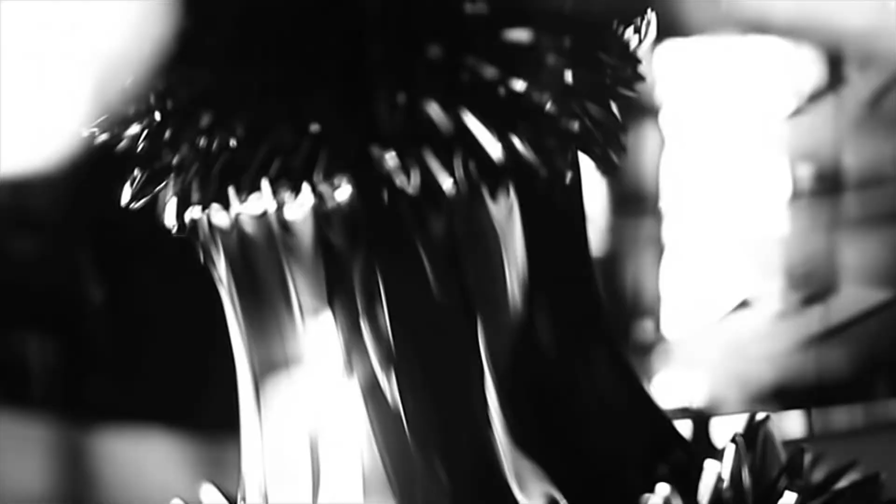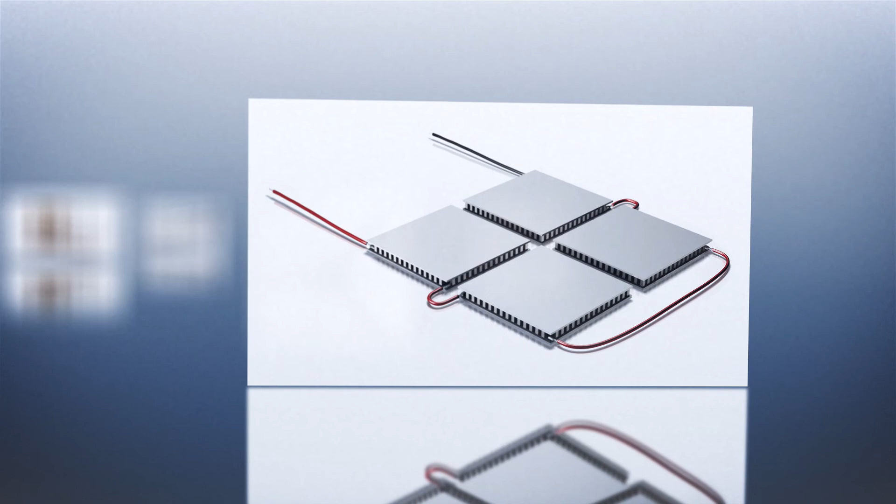Since its foundation in 1980, Ferrotec has polished its unique, distinctive technologies and launched a wide range of products, primarily focusing on the semiconductor market, and greatly expanded its presence on the world stage. In the fiscal year ending March 2022, we had 133.8 billion yen in net sales and 26 billion yen in ordinary profit, both record highs.

Let's look at our growth strategy for the semiconductor equipment-related business segment. The semiconductor memory market is being boosted by the expansion of communications and network demand, the use of AI in applications such as automated driving, and investment in data centers. Over the medium and long term, rising use of applications such as the metaverse is expected to drive an explosive increase in demand for semiconductors, such as the chips used in 3D image processing.

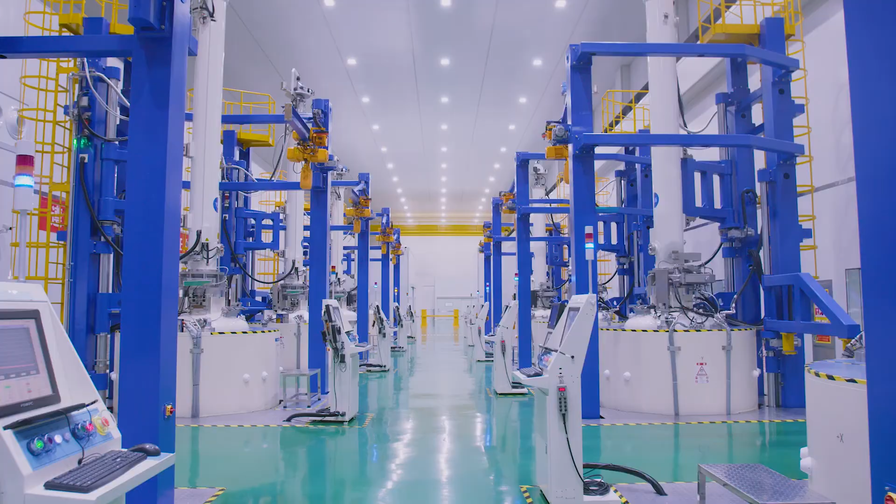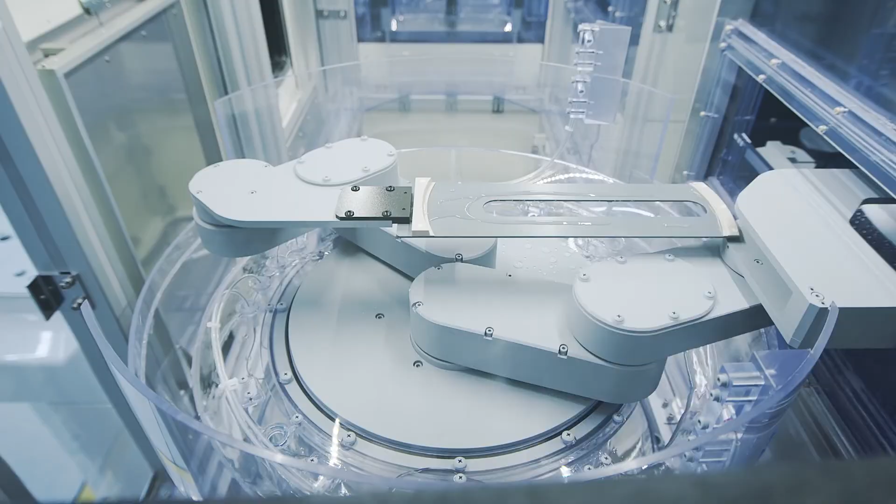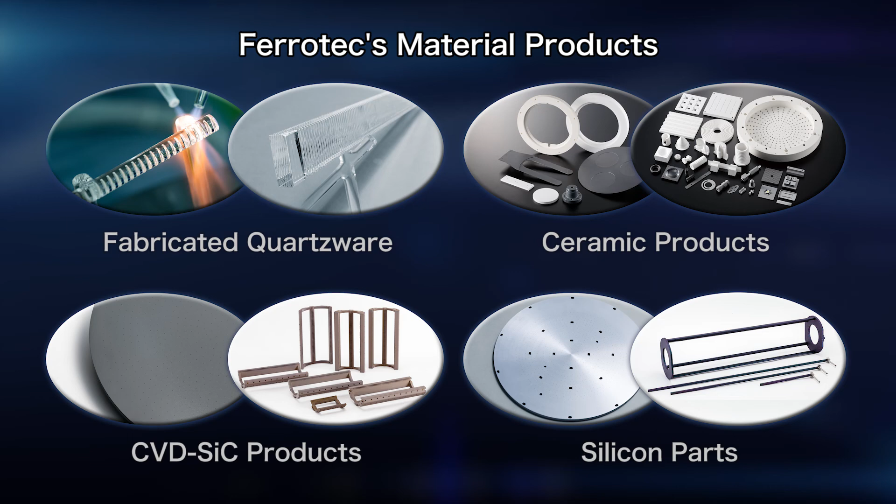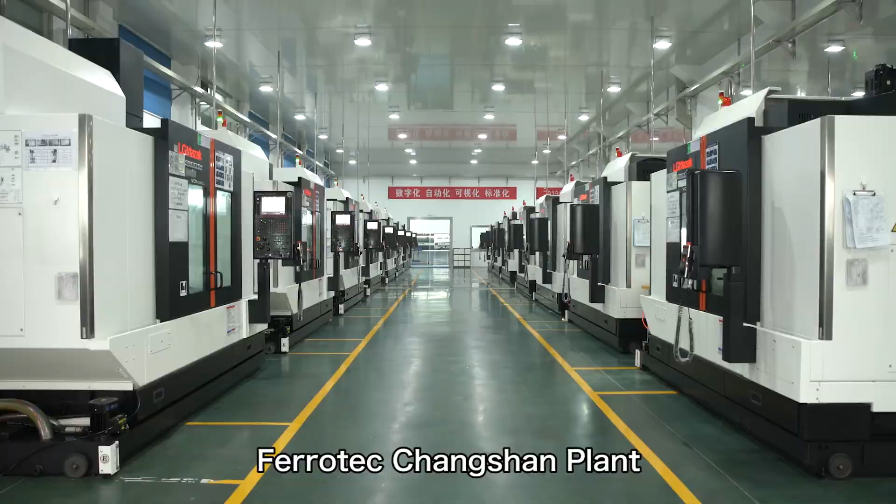The governments of Western and Asian nations are therefore actively supporting semiconductor investment, and we are aiming to expand our business around the globe. Demand is growing for our mainstay material products as the result of increasing new investment in semiconductor production equipment and the high operation rates of semiconductor manufacturers. In order to meet the growing demand for fabricated quartzware, we are planning increased production in China at our Dongtai plant and our Hangzhou plant, and a second phase of increased production in our Changshan plant.

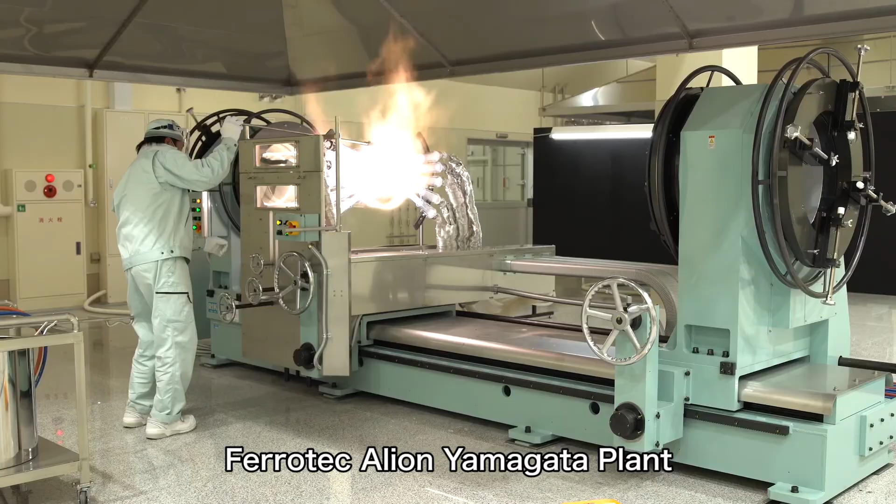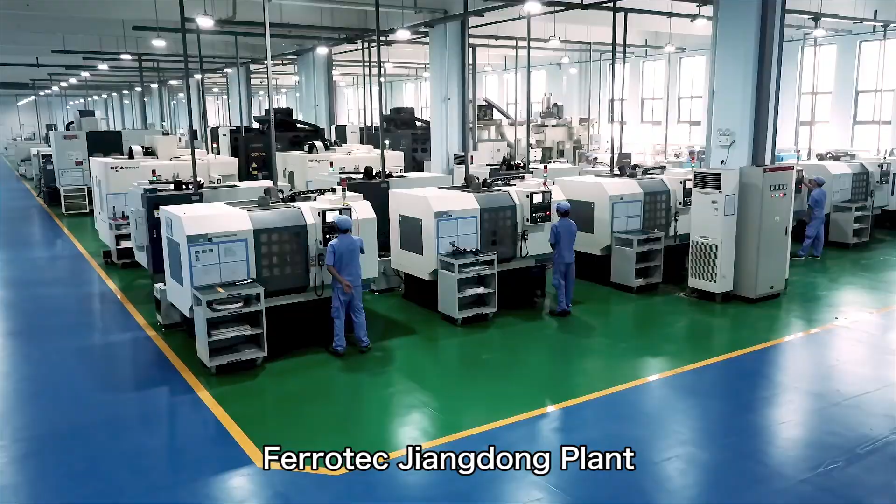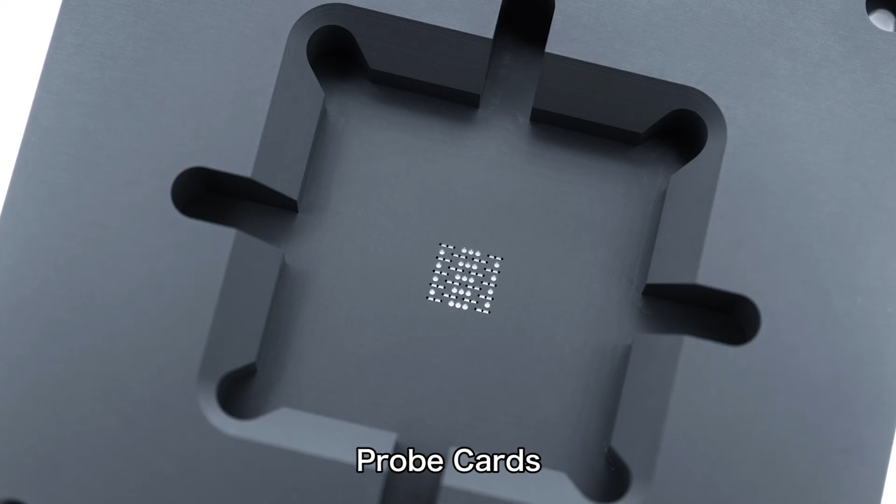We are also planning to enhance our ability to provide development and prototyping support to semiconductor production equipment manufacturers through our Yamagata plant in Japan. In the area of fine ceramic products, capital investment from the semiconductor market is growing rapidly. So we are further increasing production at our Jiangdong plant and will begin increasing production at our Changshan plant. At our Ishikawa plant in Japan, we develop and manufacture machinable ceramics products such as probe cards that are used in wafer inspection processes.

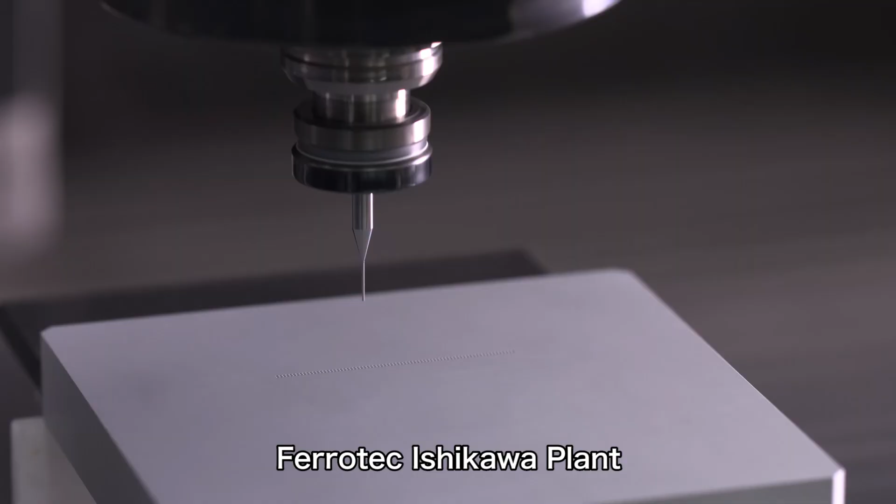In October 2022, we plan to complete construction of a second plant to meet rising demand for high value-added products and to increase our fine ceramics production. Demand is also growing for the abrasion and heat-resistant CVD-SiC products manufactured in our Japanese Okayama plant, so we are adding a second wing to the plant. We also plan to increase production at our Changshan plant to meet the demand of the growing Chinese market.

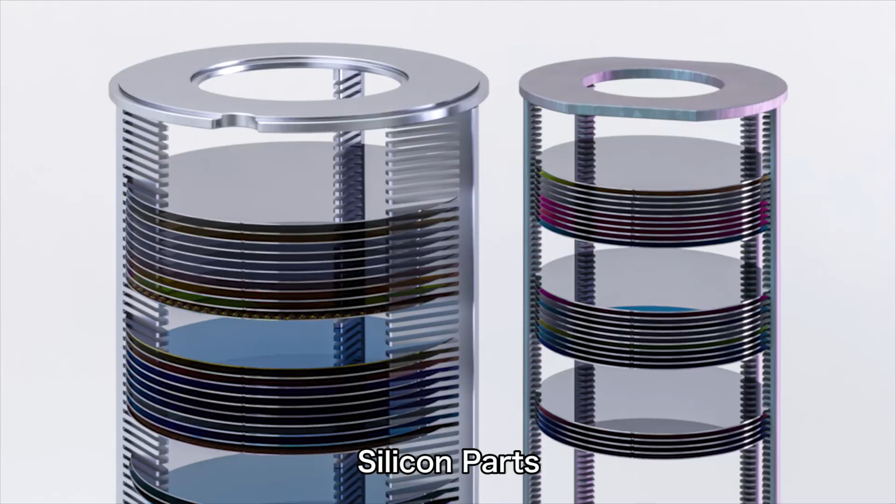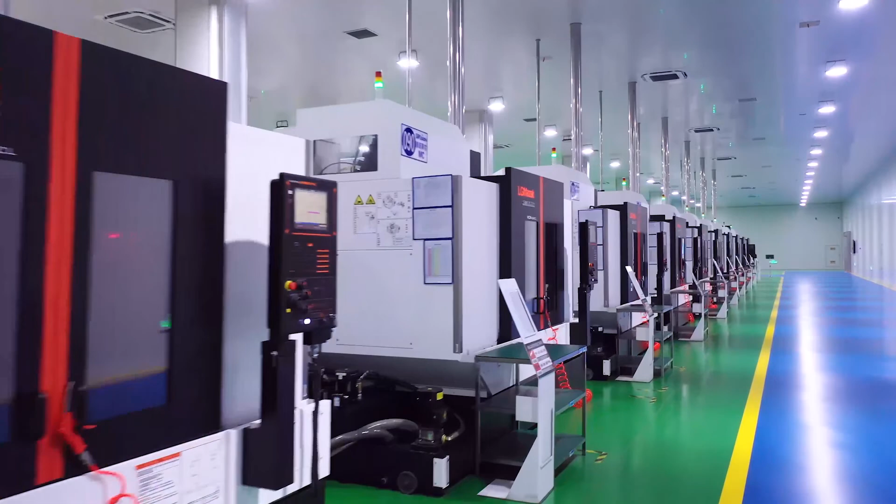Demand for the silicon parts used in high-temperature semiconductor manufacturing processes is also rapidly growing among equipment manufacturers and device manufacturers. That's why we're increasing production in our Chinese Yinchuan and Changshan plants as well. We provide 65% of the global market share for vacuum feed-throughs, core products that use ferrofluid technology. They are essential parts of semiconductor production equipment.

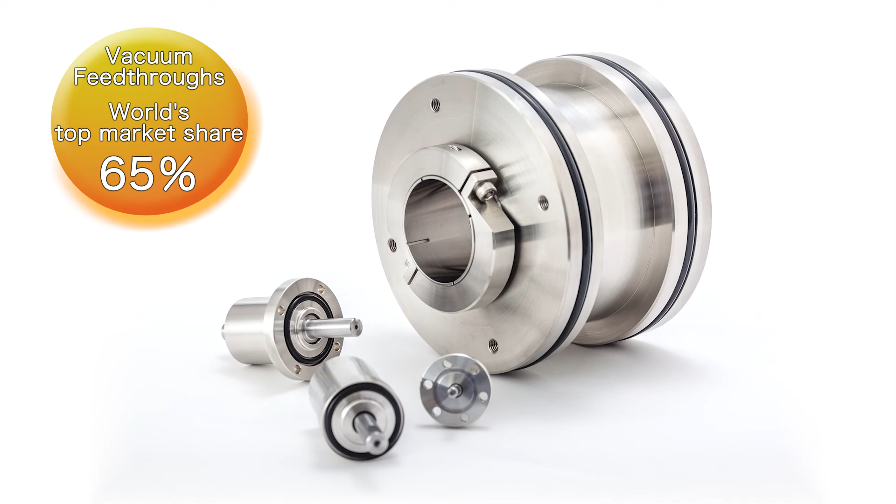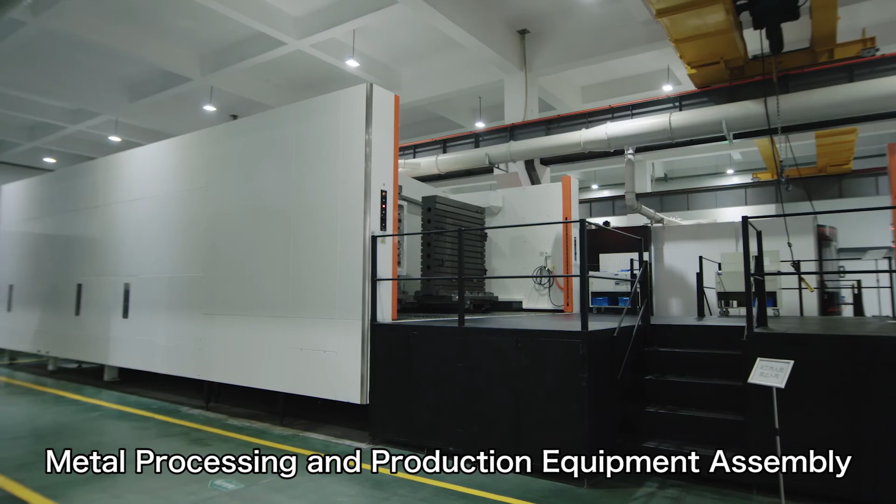In our metal processing and machine assembly contract manufacturing business, the expansion of the semiconductor market is driving increased demand for vacuum chambers, robot components, and unit assembly. We are expanding business in this segment through initiatives such as deploying new state-of-the-art manufacturing machines in our Changshan plant. We are also considering expanding production in Japan.

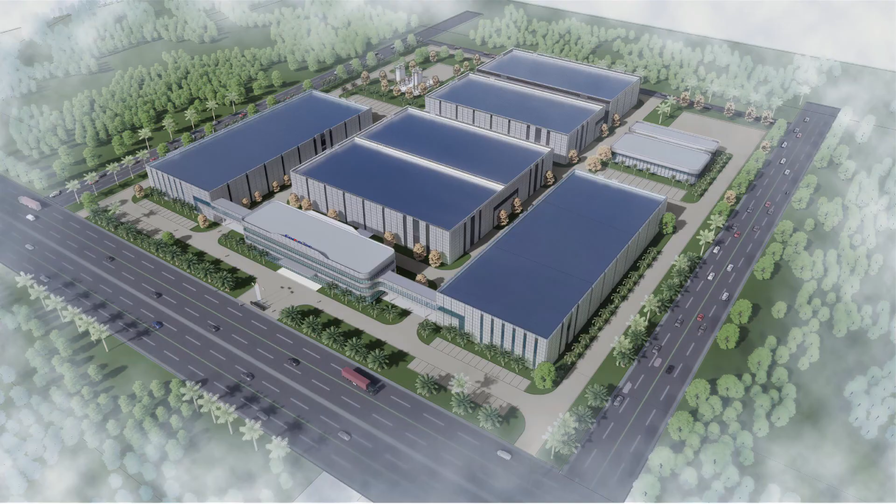In April 2022, we established a new manufacturing subsidiary in the Malaysian state of Kedah, which borders Penang. In response to strong demand from our customers in Southeast Asia, in the future, we will establish a mega factory for metal processing, robot assembly, and the supply of semiconductor-related products such as quartz and ceramics.

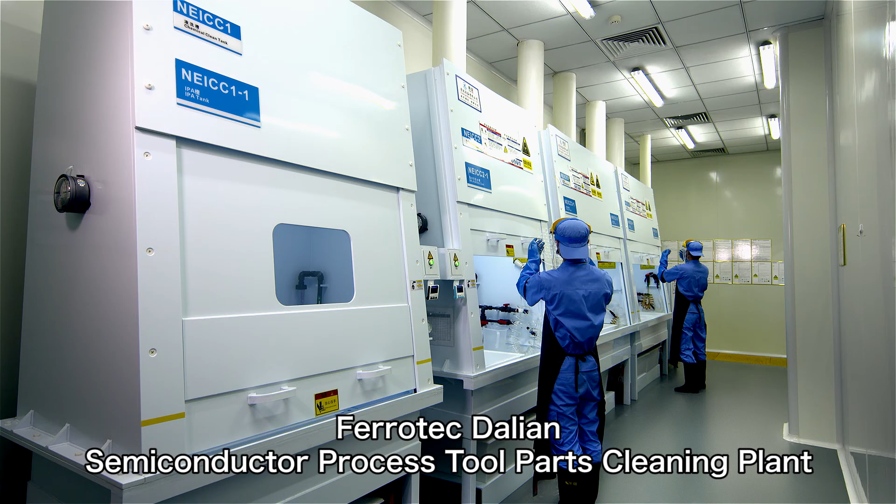For our process tool parts cleaning service for Chinese-based semiconductor companies and OLED and other flat panel manufacturers, in 2021, we began operations at our new Guangzhou plant in Guangdong Province and a third plant in Neijiang, Sichuan Province. In Tianjin, we increased our production capacity by relocating our plant. In the future, we will strive to expand our cleaning business even more proactively through our 6 locations and 9 factories. Semiconductor investment is also booming in Japan. So we are expanding and enhancing our semiconductor-related products in Japan as well.

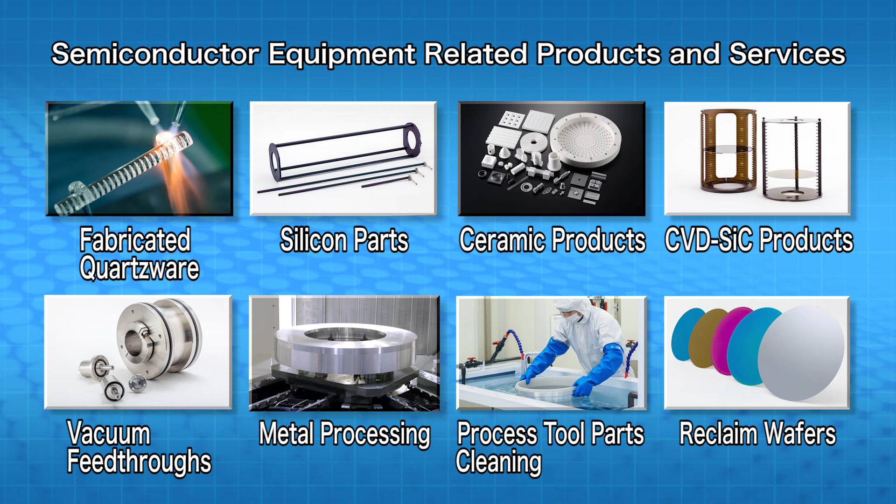We plan to continue reinforcing our production capabilities throughout the world. In the area of semiconductor wafer production, in Yinchuan, China, we are manufacturing the silicon ingots used in the fabrication of semiconductor wafers. In Shanghai, we manufacture 4, 5, and 6-inch small diameter wafers, as well as 8-inch wafers. In Hangzhou, we manufacture both 8 and 12-inch wafers.

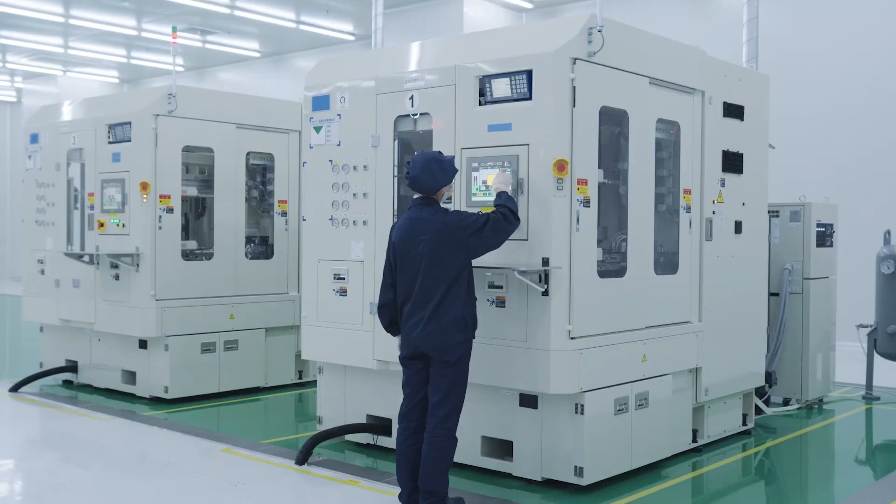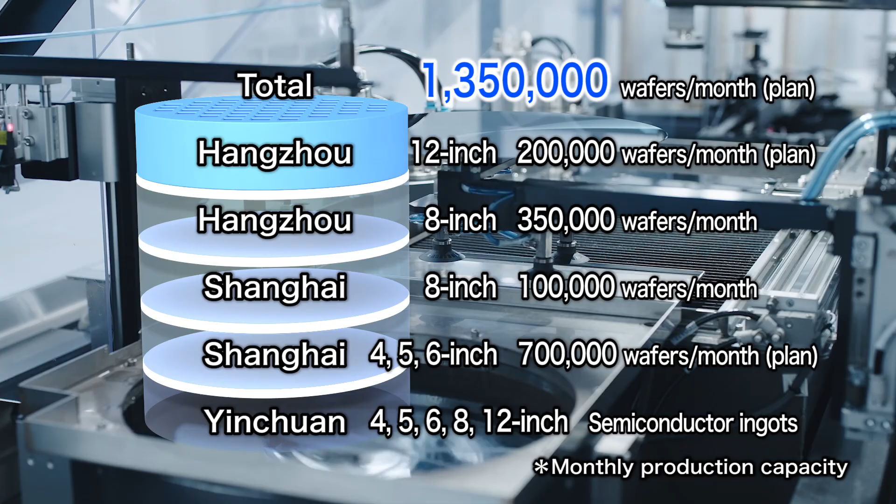12-inch wafers show a great deal of promise, driven by the tide of nationalization in China. By the end of 2023, we will establish a production system that increases monthly production volume to 200,000 wafers to meet this growing demand. As for epitaxial wafers, we are building a new plant in Lishui, located in Zhejiang Province, with the aim of further increasing production from our current capacity of 60,000 12-inch wafers per month.

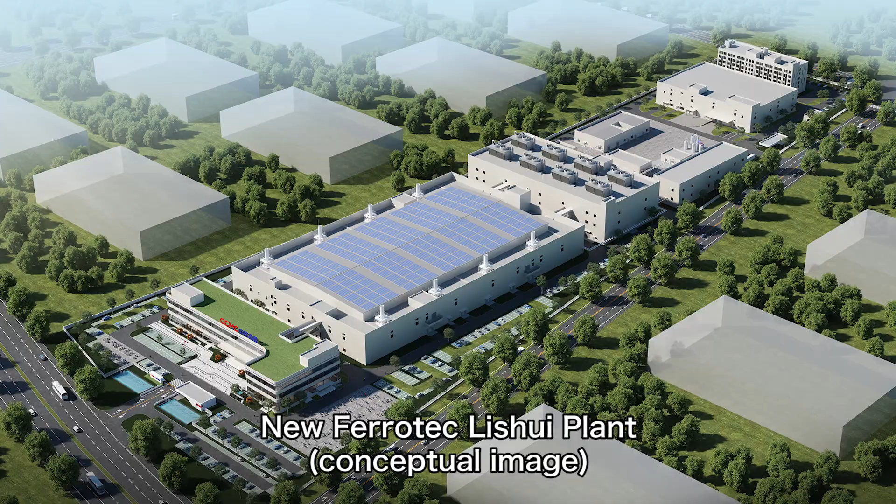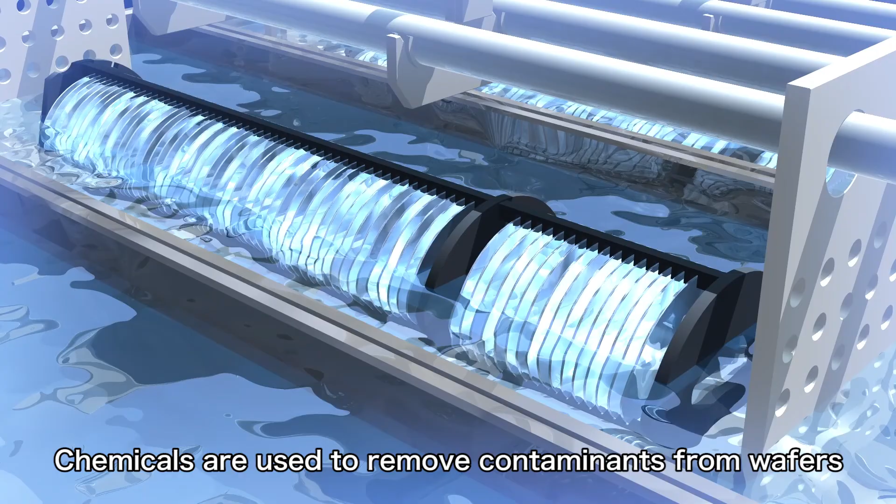Reclaim wafers are regenerated to like-new quality, so they can be reused multiple times. This significantly cuts costs for device manufacturers. We are mass-producing reclaim wafers in our Tongling plant, located in Anhui Province, and by the end of 2023, we plan to expand our capacity to produce 200,000 reclaimed wafers per month.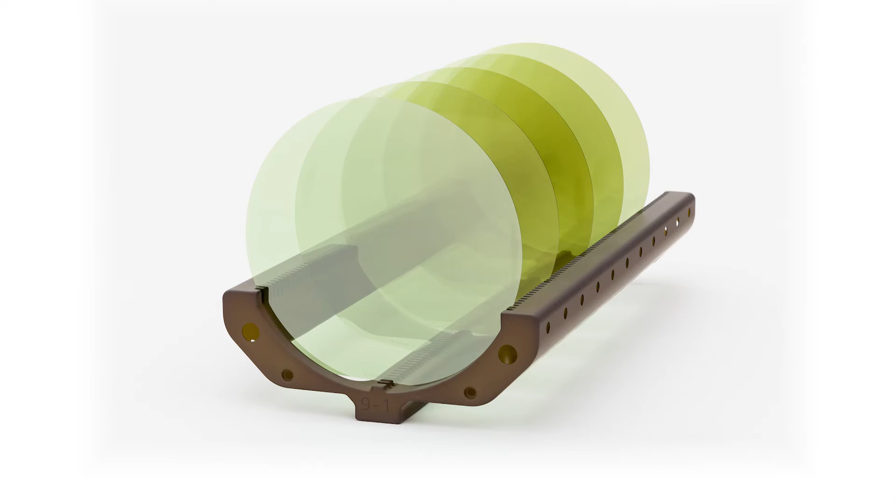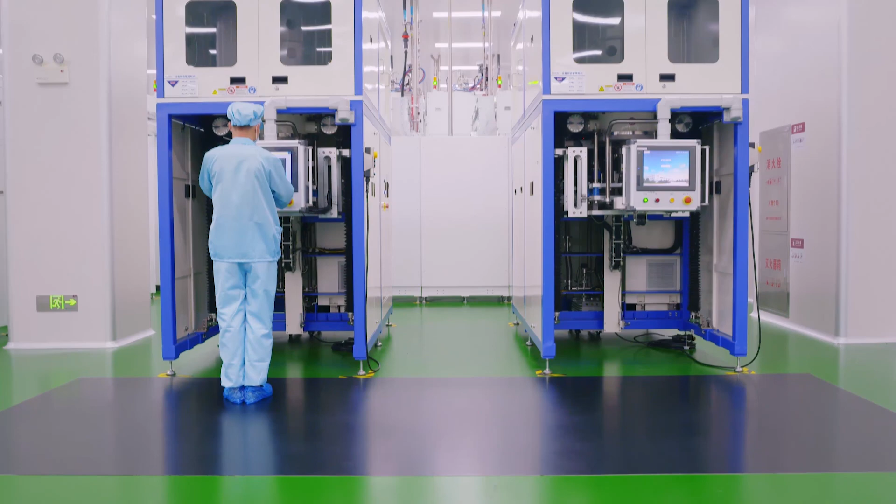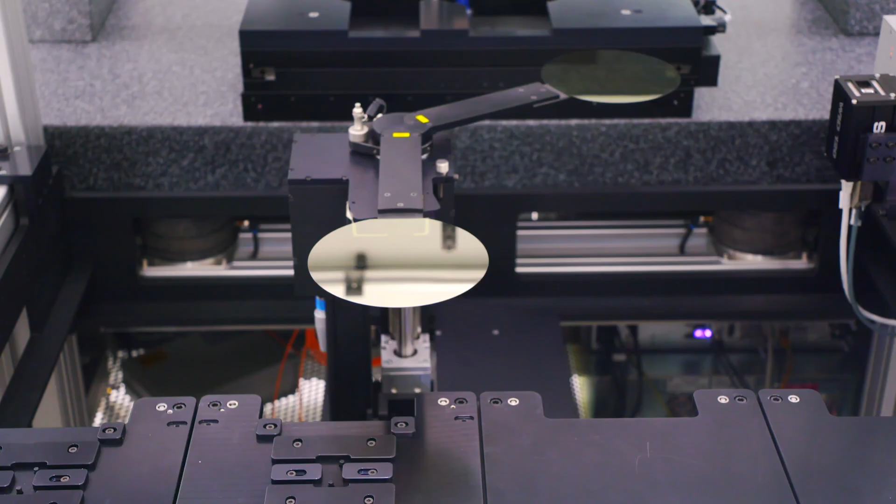Our new plant in Tongling, Anhui Province, develops and commercializes SiC single crystal wafers, anticipated as the 3rd generation of semiconductor wafers. We currently have installed 110 SiC crystal growth furnaces, and we are aiming to increase monthly production to 65,000 wafers to meet demand for power semiconductors used in 5G RF components, electric vehicles, medical equipment, and other devices.

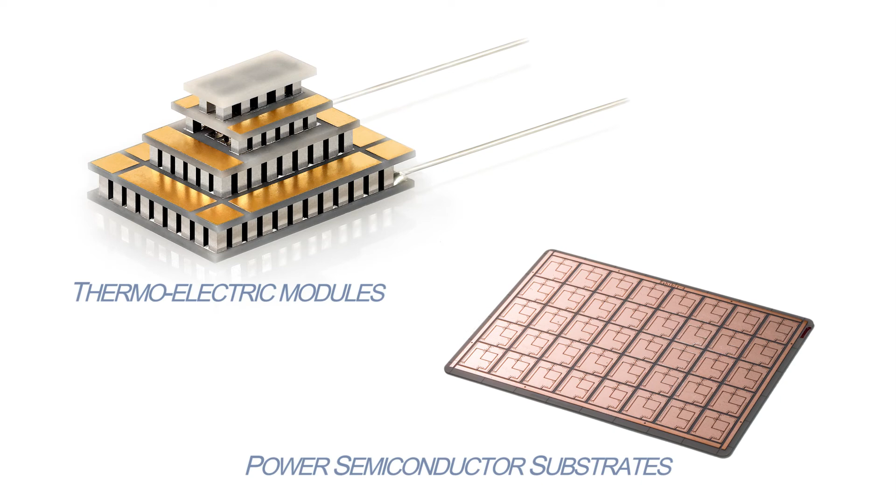Another pillar of Ferrotec's business is the electronic device business. We command the top global market share for thermoelectric modules, which enable accurate temperature control, for which we have the world's highest production capacities. They're used in the automotive, semiconductor, biotechnology, network communications, and home appliance industries, and our business is still growing. Therefore, we will further establish in our new Shangshan plant a production capacity of 3 million units per month.

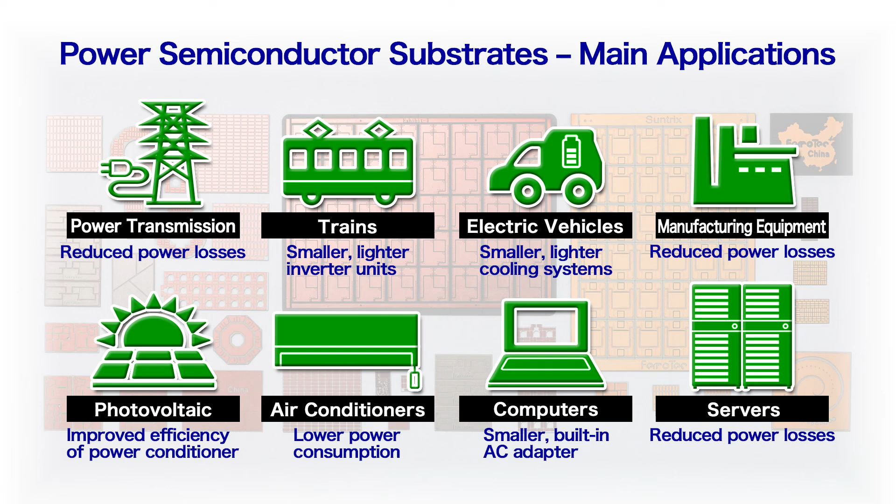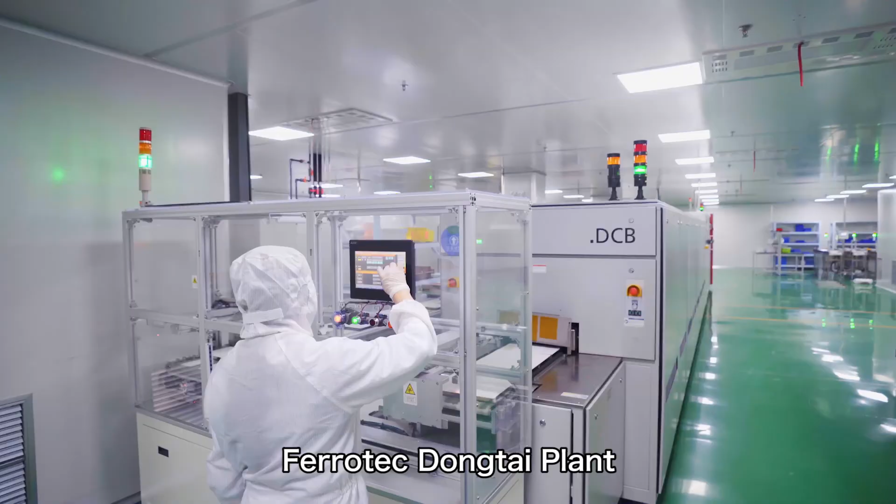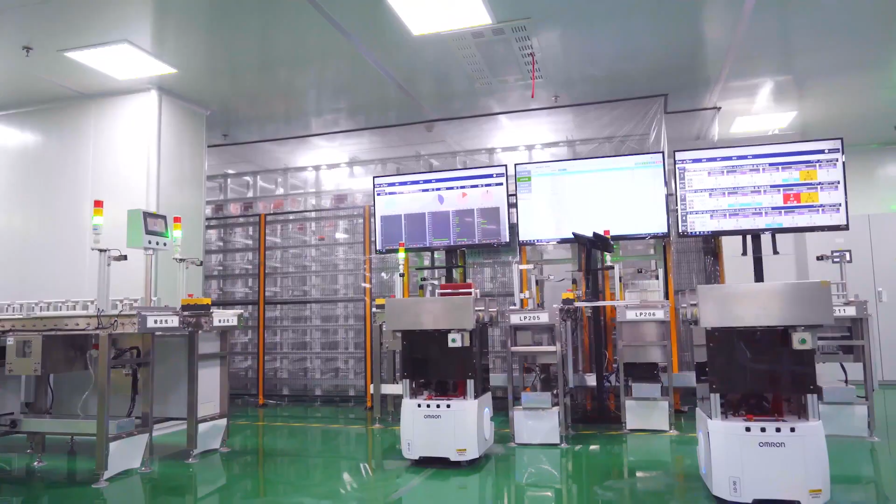Power semiconductor substrates are the key to lower power consumption. Demand for DCB substrates is growing, led by the need for manufacturing equipment efficiency improvements and demand for use in home appliance inverters. We plan to expand our production capacity from the current 1.1 million substrates to 1.6 million substrates. We will also increase our monthly production of AMB substrates from 200,000 to 450,000 to meet rising demand for electric vehicle inverters and other devices.

We also plan to increase monthly production of DPC substrates for optical communications such as 5G and data centers to 800,000 per month. In addition to our current production sites in Dongtai and Shanghai, we will also build a new plant in Neijiang, Sichuan province to meet the needs of the rapidly growing market. We have also established the Power Semiconductor Technology R&D Institute in Dongtai. This will reinforce our research and development capabilities for the next generation of power device substrates and materials.

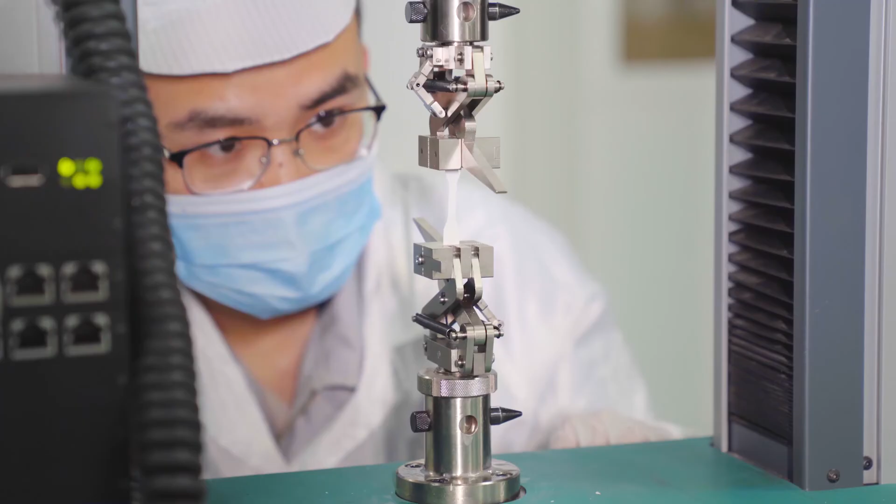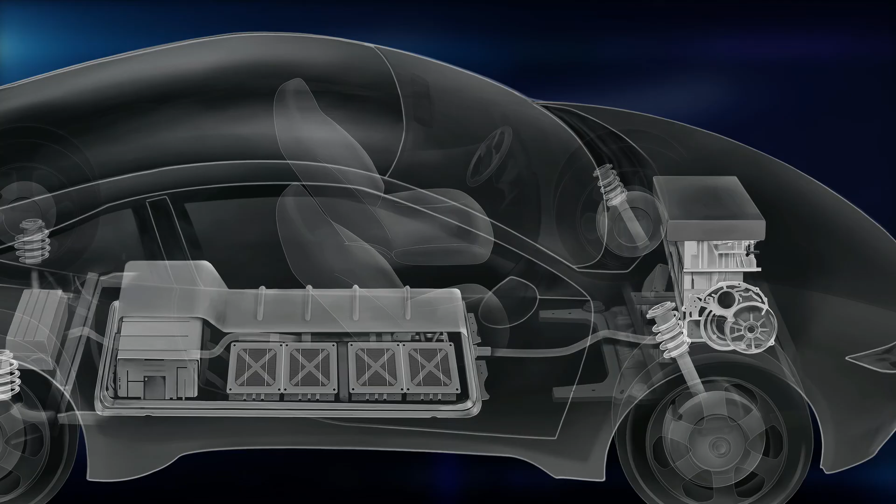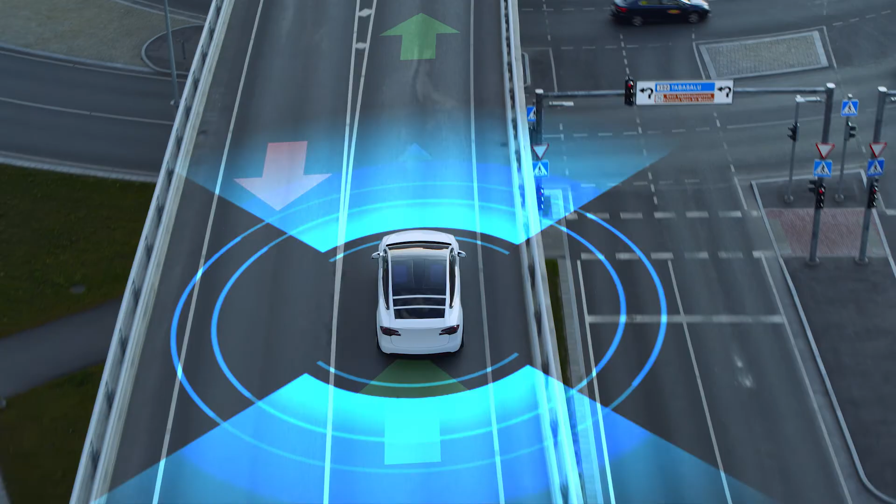The automotive-related business has been positioned as a particularly important long-term business segment. Thermoelectric modules are already used in climate control car seats, and expectations are high for even larger-scale mass production of these products, which are used in applications such as cup holders and also in the temperature control of CMOS image sensors used in advanced driver assistance systems. In the future, we will also expand our business in the area of temperature sensors for use in onboard vehicle devices.

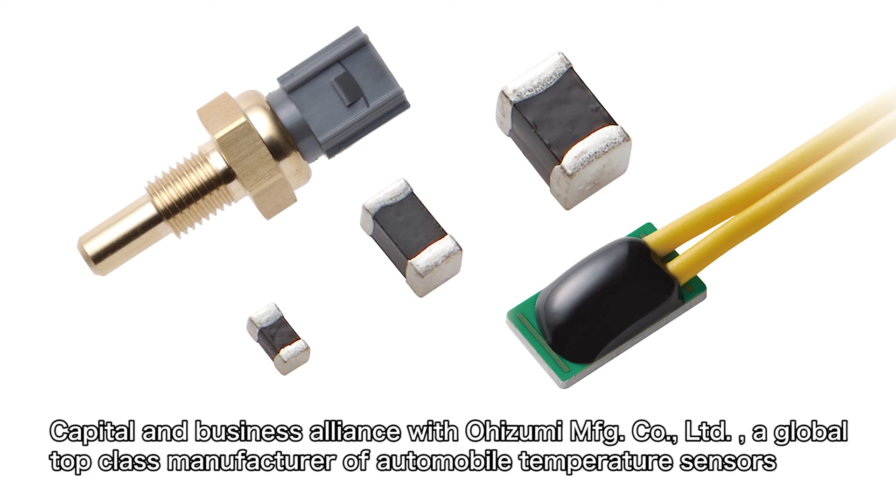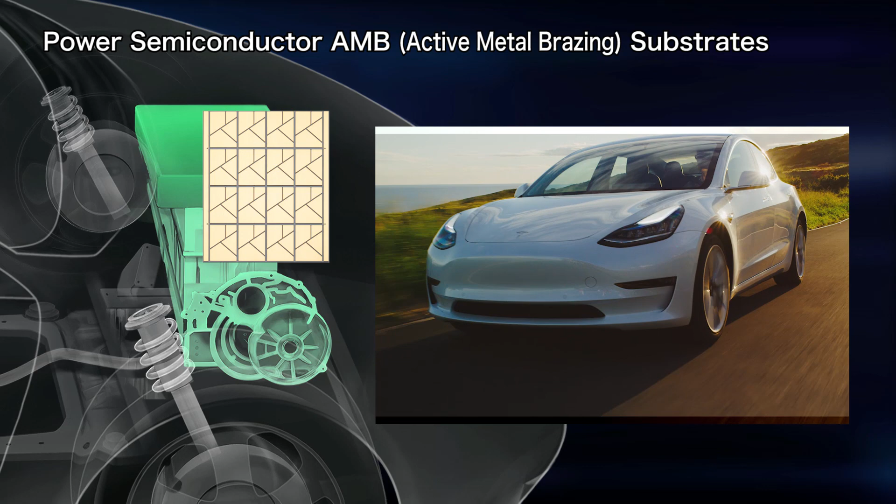AMB substrates for power semiconductors are effective at reducing power consumption and are increasingly used by major automobile manufacturers around the world. In the future, demand for these products is expected to reach beyond electric vehicles to trains and other applications.

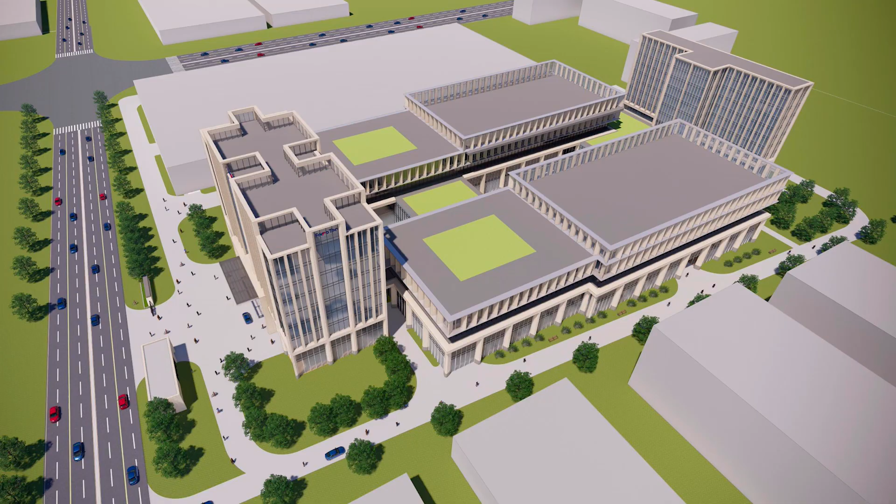We have an infrastructure of over 30 subsidiaries in China, and we aim to list 4 of our group companies, including one equity method affiliate company, on the Chinese Stock Exchange. We will thus establish Ferrotec China's head office in Shanghai, as this will enable us to strengthen our research and development, financial management, and personnel recruitment.

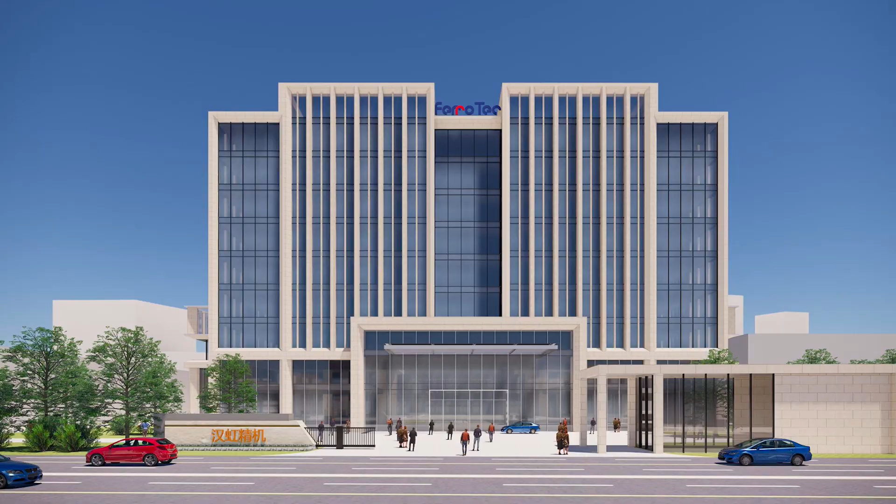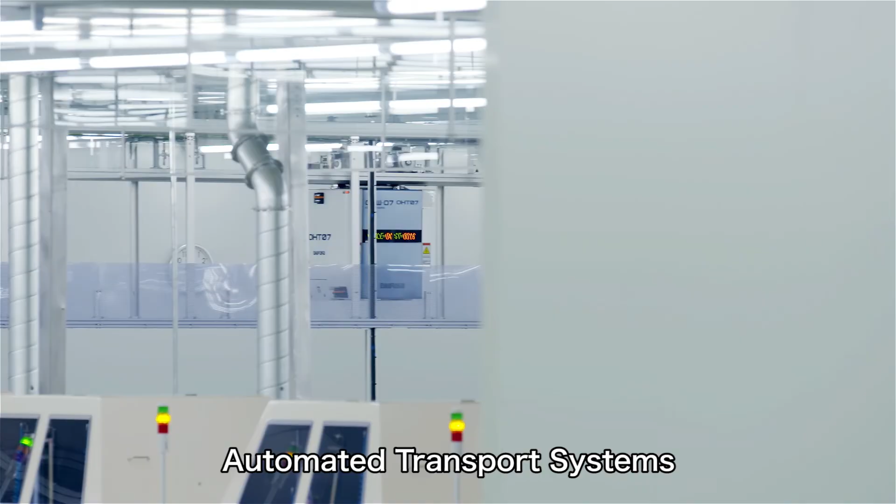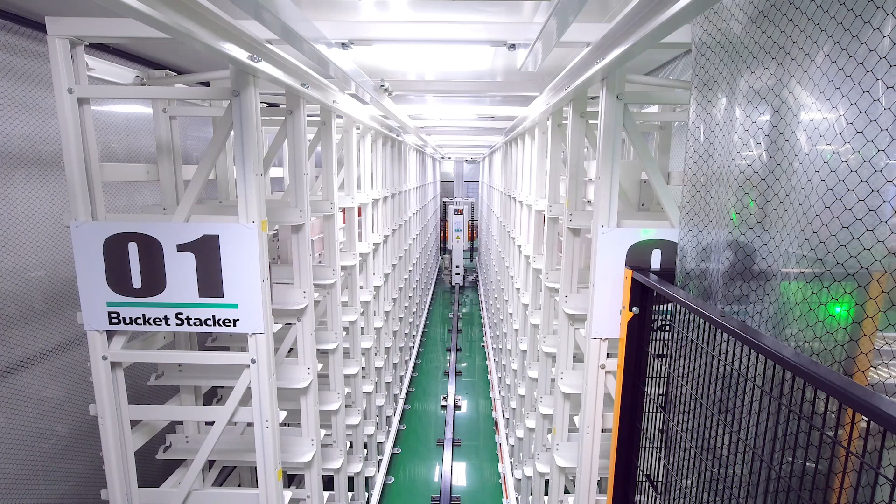Ferrotec is also working on implementing digital transformation and automation for inspection systems, transport systems, warehouse systems, and other equipment used at many manufacturing sites in China. We will improve our production efficiency and maintain our high quality by upgrading our facilities into smart factories.

The Ferrotec Group will continue to do fair and equitable business with high-tech companies in the United States, Europe, Japan, China, Southeast Asia, and around the globe. We will focus on SDGs requirements for achieving sustainable growth, led by our corporate mission, and continue to grow as a company that contributes to the people of the world.